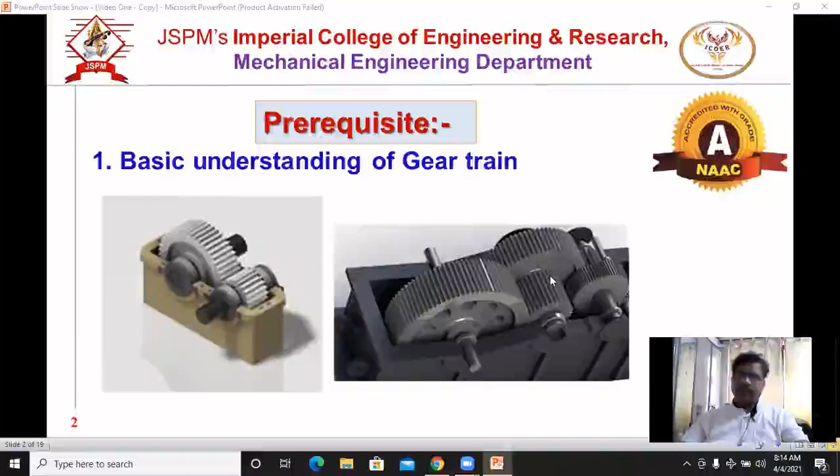He should know. Gear train is nothing but a combination of gears by which you can reduce or increase the velocity ratio, or you can transmit the power and motion. Also, the student should be knowing which are the different types of gear trains: simple gear trains, compound, reverted and epicyclic.

A simple gear train is one in which each shaft will be carrying only one gear. A compound gear train is one in which each shaft will be carrying more than one gear. Reverted is a special case of a compound gear train where the axis of input shaft and output shaft will be along the same line.

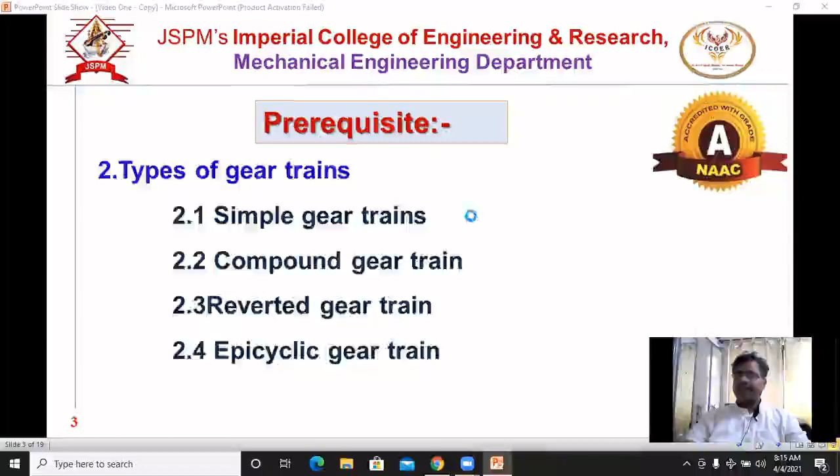And lastly, today's interesting gear, that is epicyclic gear train. In this one, we will be having certain arrangement like sun and planet, or epicyclic in nature. So for this we are going to find the holding torque. These are the prerequisites. Then this thing also the student should know before conducting this experiment: the concept of epicyclic gear train or its working he should be knowing.

The epicyclic gear train consists of a sun gear which will be acting as the input gear and the arm which carries the planet gears. The input is sun gear, output is the arm carrying the planets. This is encompassed by one internal gear called as the annular gear. Annular gear will be having the internal teeth.

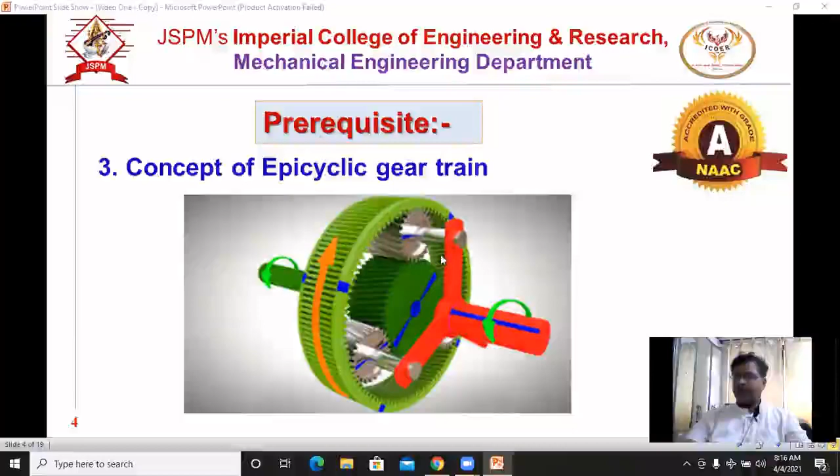Now what is holding torque is, if I want to stop only this outer internal gear and at the same time all other gears are rotating, the torque required to be applied on this internal gear will be our holding torque. Again, the student should be knowing which are the different torques that are acting in case of an epicyclic gear train: input torque, output torque and the holding torque.

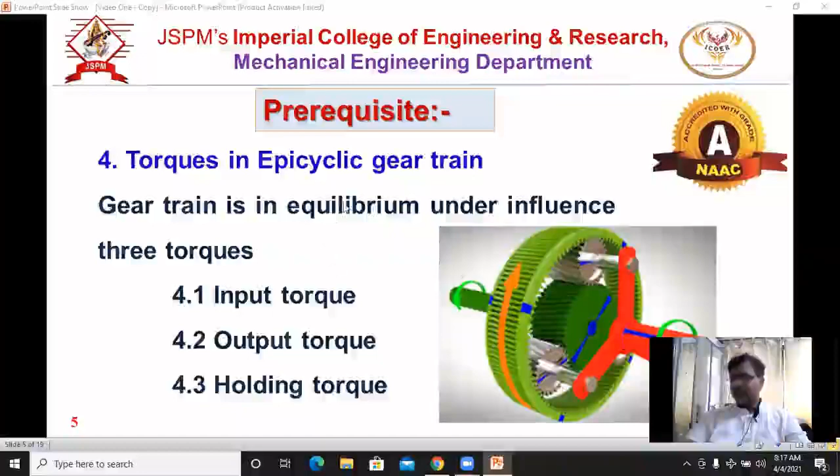The torque carried by this input shaft connected to the sun will be input torque. The torque carried by this arm shaft will be the output torque. Holding torque, the torque required to stop this annular gear. This is the holding torque. One more thing is the holding torque will be the difference of input torque and output torque. All these things the student should be knowing before conducting this experiment.

Now coming to today's objective, I want to measure the holding torque of an epicyclic gear train. Means what? I want to find how much amount of torque or load I need to apply on this internal gear to make this one stop. If I want to stop this annular gear, how much amount of force or torque I need to apply, I need to find. How I can find?

If I am putting a braking arrangement on this, if I am putting a belt drive and applying certain load, then for a particular load the annular gear comes to rest. I can say that will be our holding torque. Like this we can find practically. And if I want to find theoretically, how will you find it? Simply I will find how much is input torque and output torque. The difference of these two will be our holding torque.

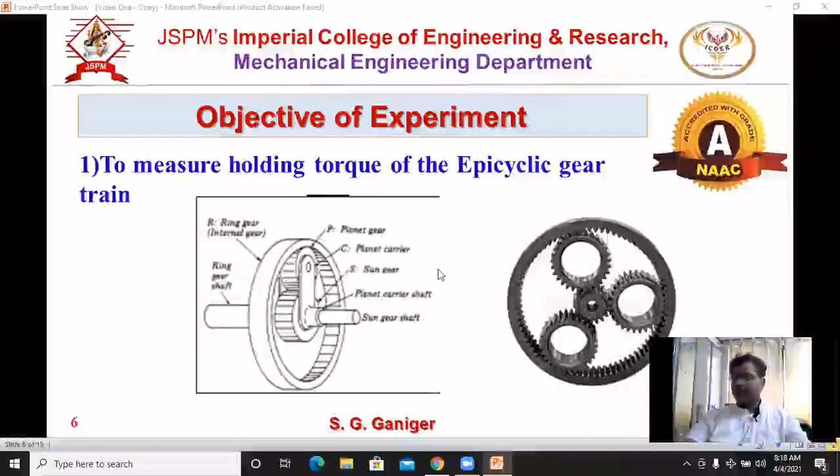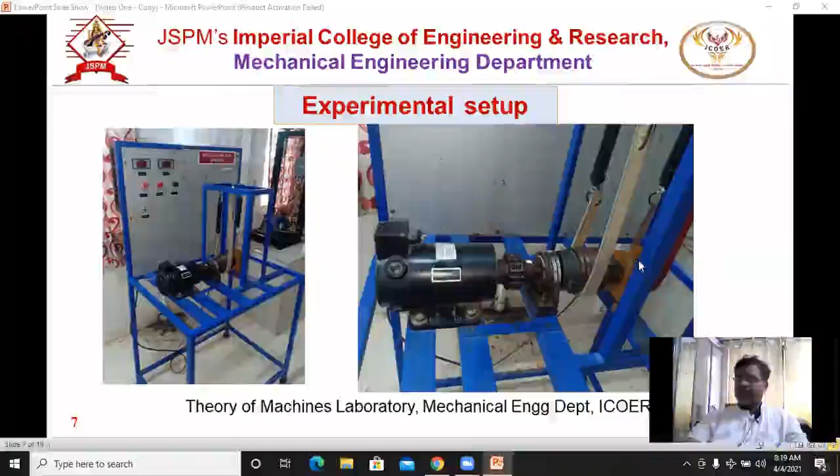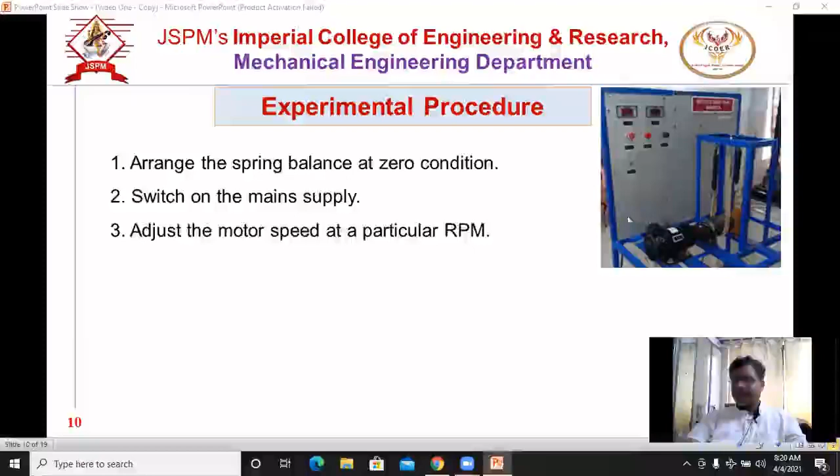Then switch on the mains supply. Adjust the motor speed at a particular RPM. Then we will be waiting for the system to be stabilized. Start the experiment by loading the pulley in a stepwise manner, starting with zero, and note down the reading required to stop the epicyclic gear train.

Initially we will be putting a certain load, let us say 0.5 kg, on the output shaft, and then we will go on applying the load on the epicyclic gear train till it comes to rest. When it comes to rest at that particular position, we will be taking the readings. Which are the readings? I will be measuring the input speed and output speed using the tachometer. Also I will be noting the voltage and current readings using the voltmeter and ammeter.

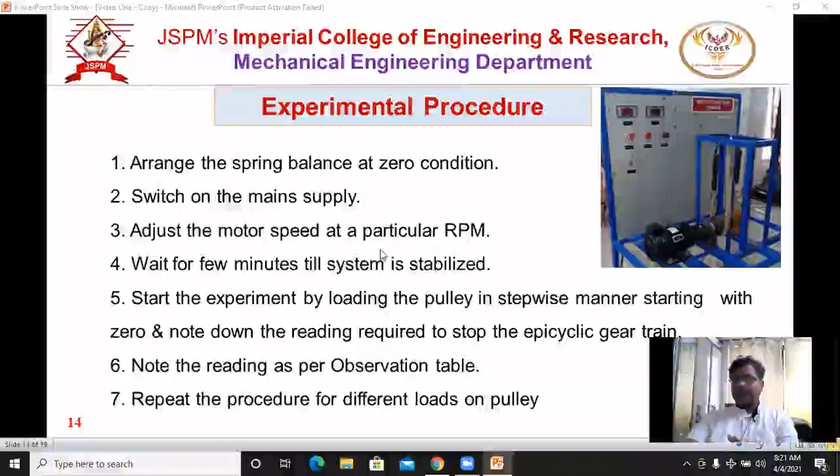Now if I want to go for the next reading, let us say 1 kg, I will apply 1 kg of load on the output shaft. Then I will go on tightening the epicyclic gear train using the spring balance till it comes to rest. When it comes to rest at this position, I will be taking the second reading. I will be measuring input speed, output speed, voltage, current. Note the readings, then repeat the procedure for different loads on the pulley.

This is our observation table. Now we will see the actual readings taken on the machine. Initially we will be putting a load of 0.5 kg on the output pulley. Then I will go on tightening the epicyclic gear train. Say for 2 kg of load on the epicyclic, it is coming to rest. At this position, I will be taking the reading. I will measure the input speed, output speed, voltage, current. This is the first set of readings.

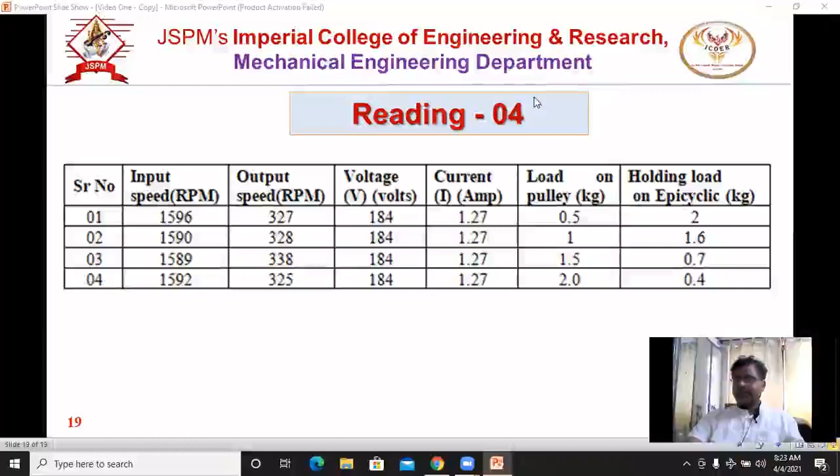Similarly, second. For the second, what change will be there? Instead of 0.5, I will be putting a load of 1 kg on the output shaft pulley. Then I will again be tightening the belt on the whole epicyclic till it comes to rest and take all these readings. Similarly, 1.5 kg and 2 kg on the output shaft pulley. Like this we will be taking the readings. Once we take the readings, we will be performing the calculations. And how we take the readings in the practical, I will explain with the actual experimental setup.

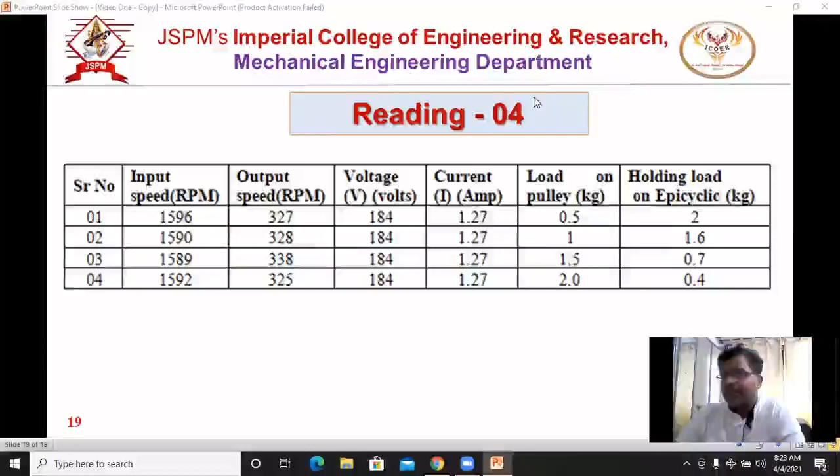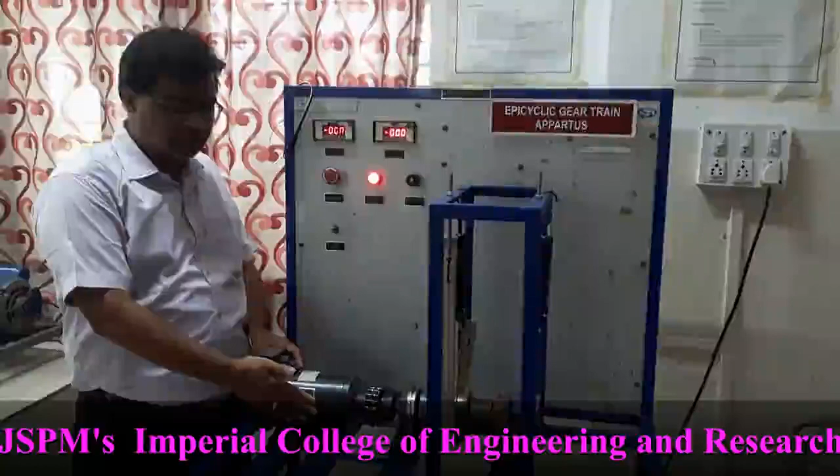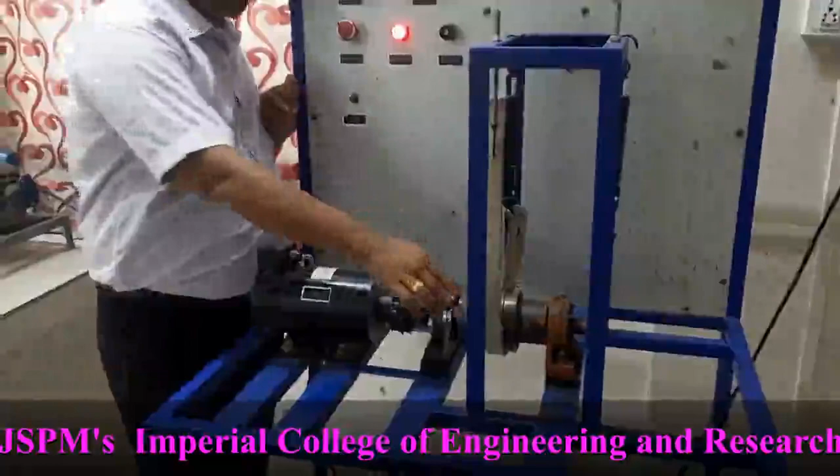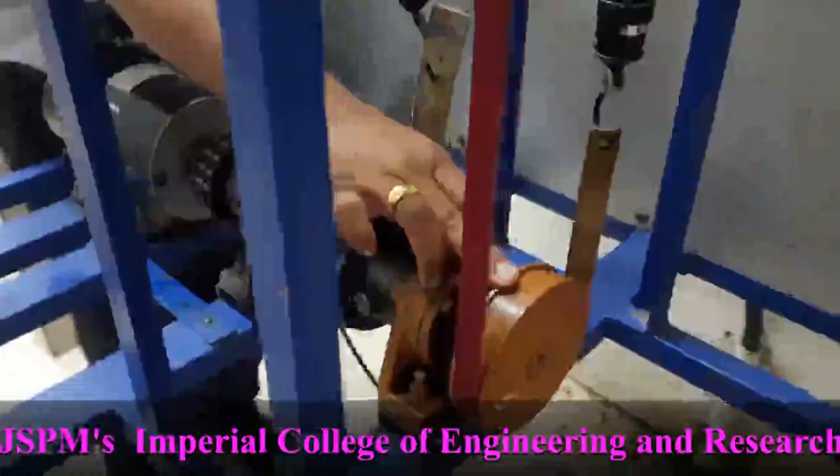Now this apparatus is called the epicyclic gear train. In this one we can see that this is the DC motor, this particular part is the epicyclic gear train, this is the input shaft of the epicyclic gear train, and this is the output shaft of the epicyclic gear train. It is connected to the pulley like this. Now on this epicyclic we have a loading arrangement using this belt here. Then on the output shaft, that is the pulley, we have a loading arrangement using this spring balance.

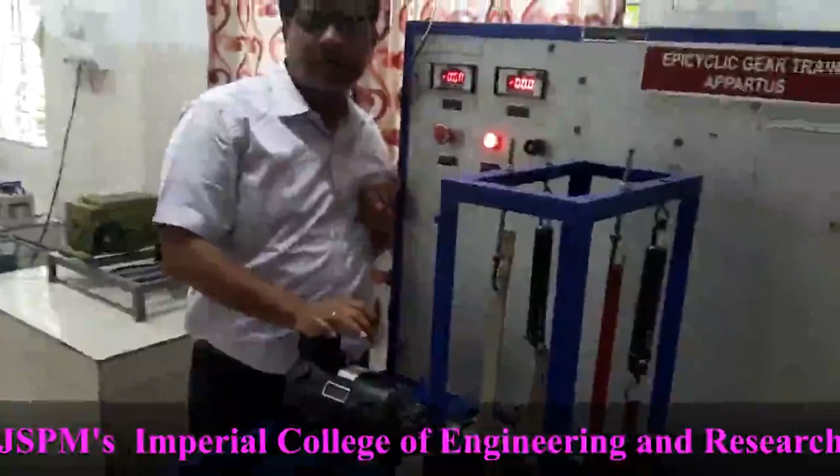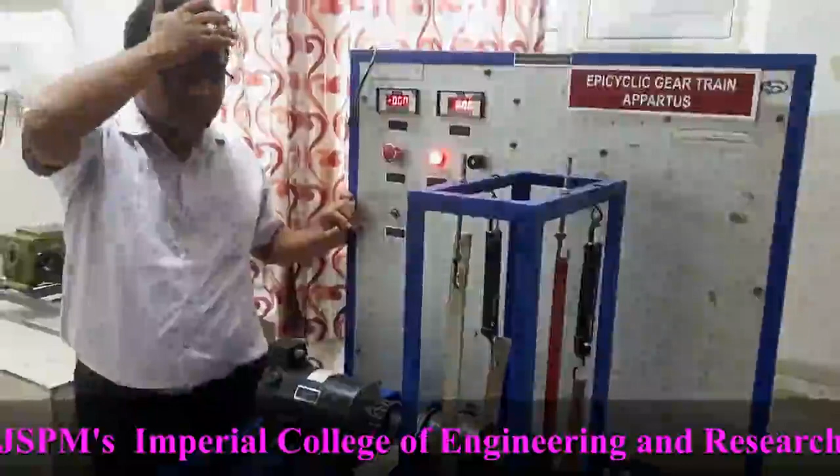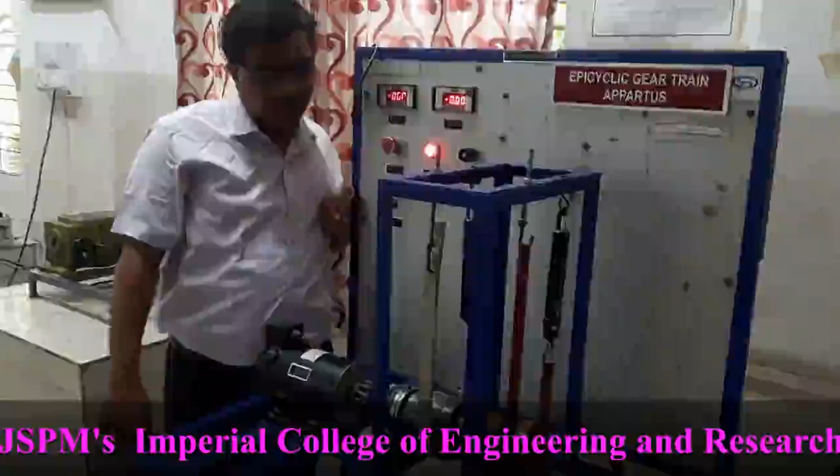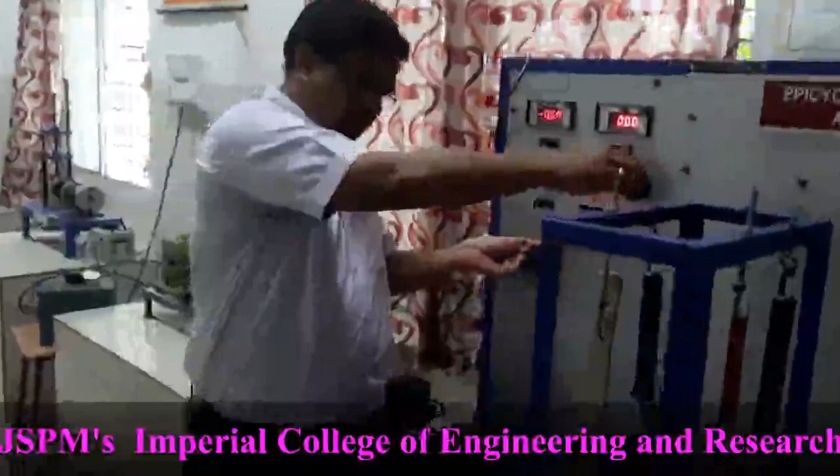Now the epicyclic gear train consists of the sun, planets and the arm. The input shaft is always connected to the sun gear and the output shaft is always connected to the arm carrying the planet gears. In this one there are 3 planet gears, 1 sun and 1 arm. The arm is connected to the output shaft, which is connected to this pulley. Now when we operate this DC motor, we can start the motor like this. Now you can see that it is rotating.

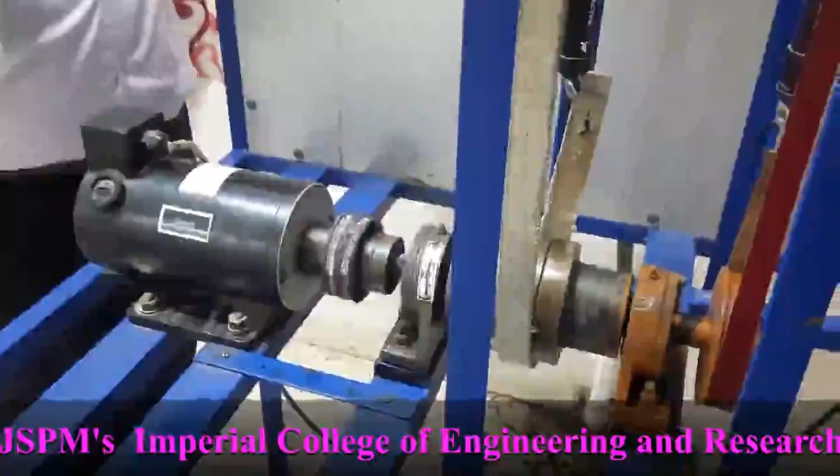So if we make this output shaft free by loosening this spring, and operate it, we can see that the output shaft is also now rotating, is it not? Now at the same time I loosen this also. Now you can see that all the things are rotating, that is the input shaft, the epicyclic gear train and the output shaft.

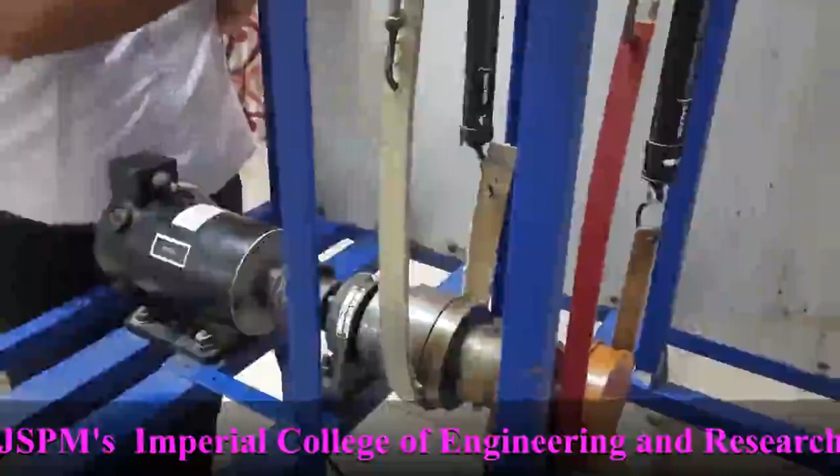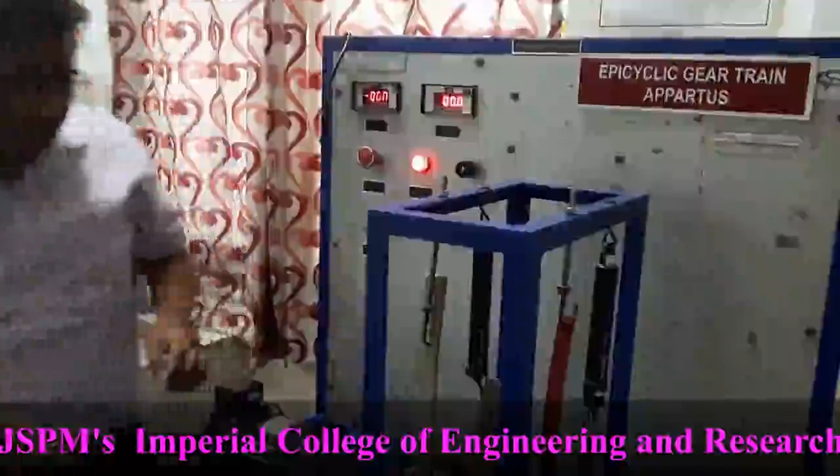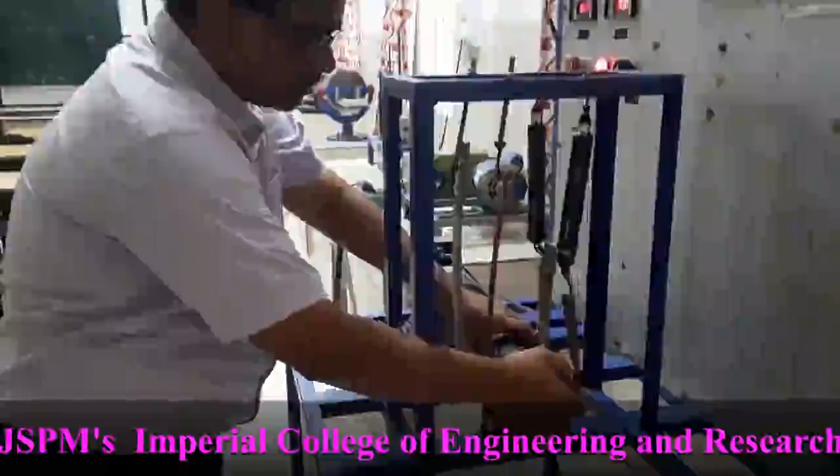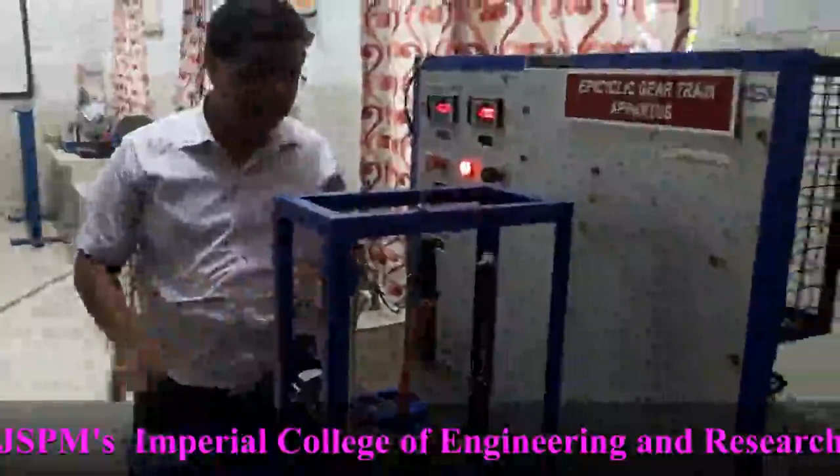So there is one term called the holding torque. Holding torque is basically the torque required to only stop the epicyclic gear train. Now to understand this holding torque, if I am holding this one tightly and I rotate this output shaft, we can see that I can rotate the output shaft, but still the epicyclic gear train is not rotating. Then how is it getting the motion? See, in this one we have the sun gear connected to the input shaft, and the arms. So holding torque is defined as the torque required to stop the epicyclic gear train while the output shaft is rotating.

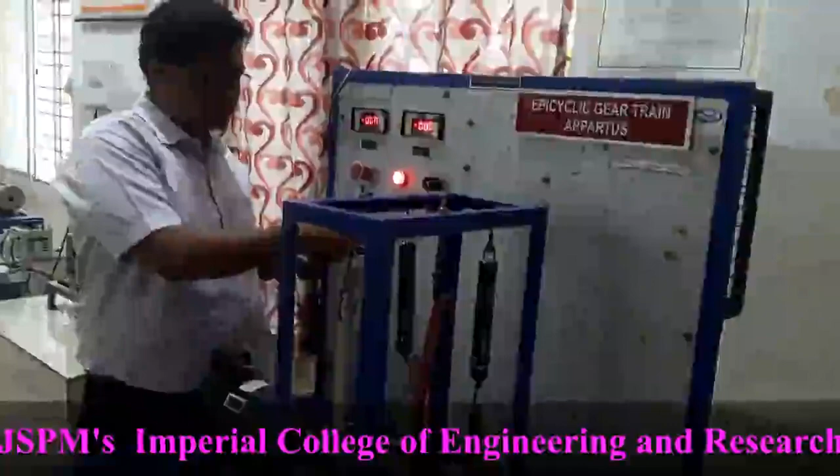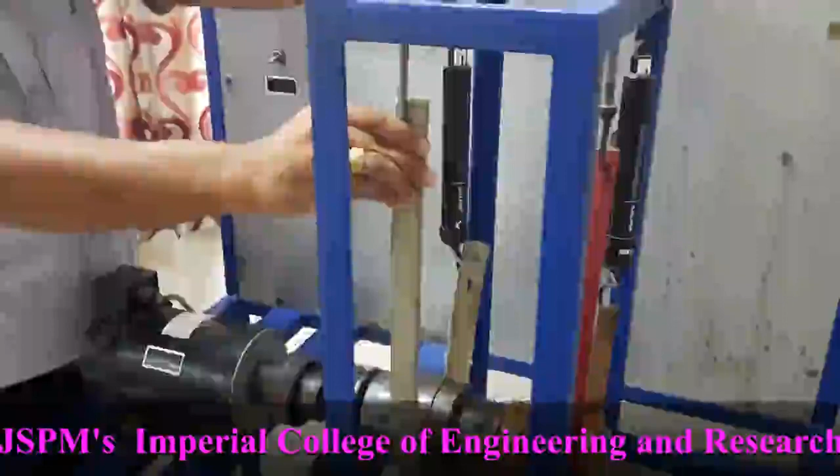So to understand this, suppose I am starting the motor. Now it is rotating with certain speed. Now if I go on increasing the load on this epicyclic gear train, now you can see that this is stopped, epicyclic gear train, input shaft is rotating and the output shaft is also rotating.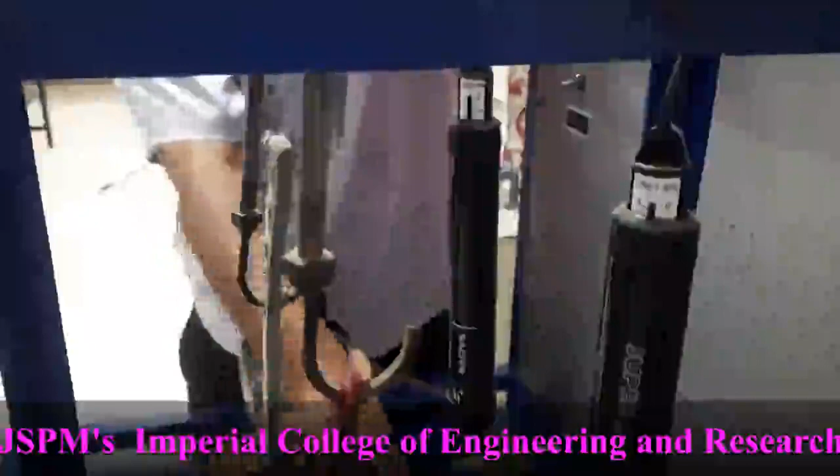So whatever torque I am applying, that is the torque applied at this end. How can I measure this one? That will be measured by spring balance mass M. Suppose it is 0.75 kgs. 0.75 into 9.81 into its radius. Like this I can find the holding torque.

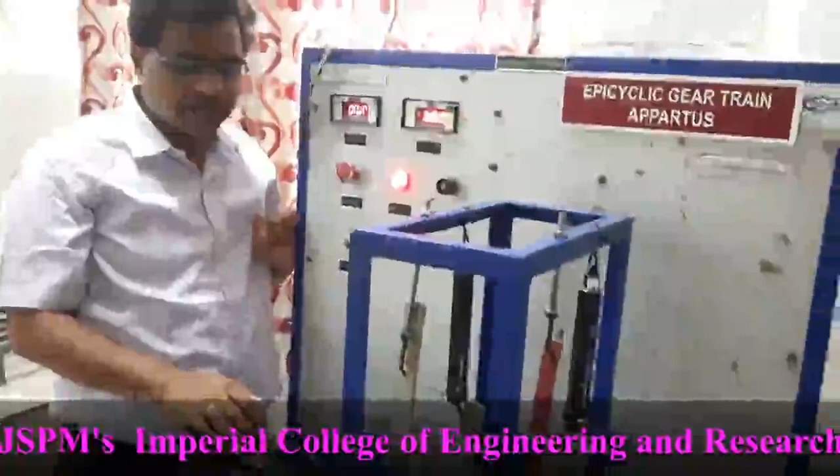Now because the power remains same, whatever the input power is there, the same power will be transmitted to the output shaft. If we are neglecting the friction, then the same power will be divided, some to this and some part to this. Now to find the input torque, I can find the input power. How can we find the input power?

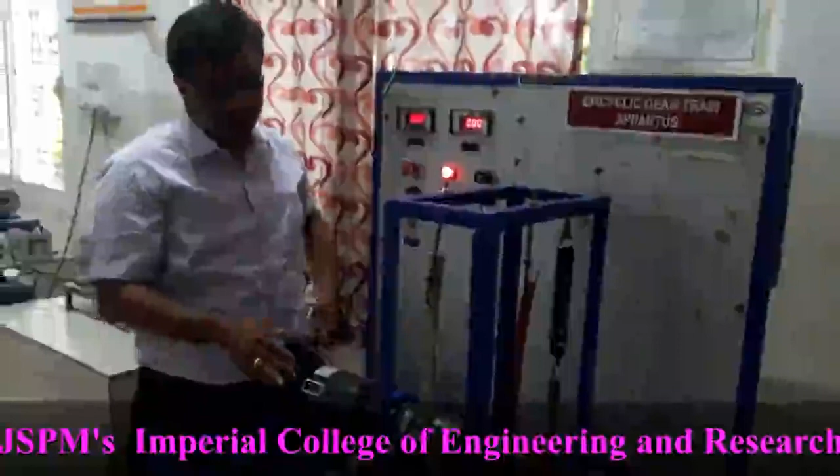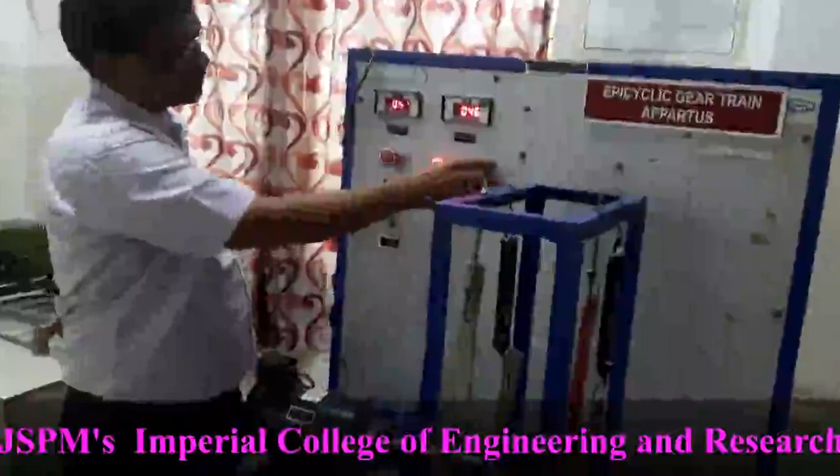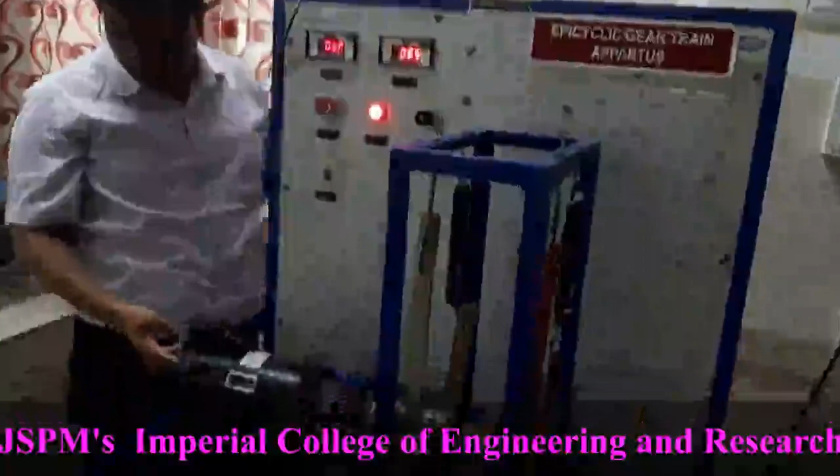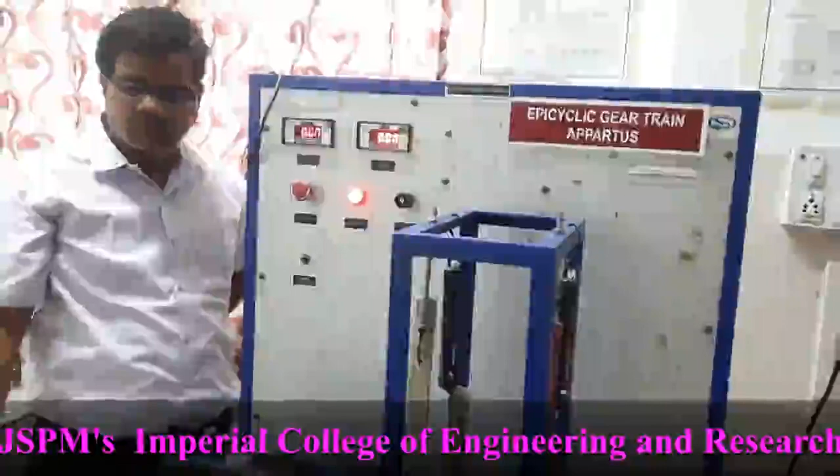See, it is a DC motor and here you can see that we are having voltmeter and ammeter attached. So when we are operating, we will be having certain readings on this voltage and current. So if I am multiplying these two, I will be getting the input power. Now by using a tachometer applied at this end, I can find the speed of this DC motor. So once I find the power and speed, by using the equation P equal to 2 pi N T by 60, we can find the input torque.

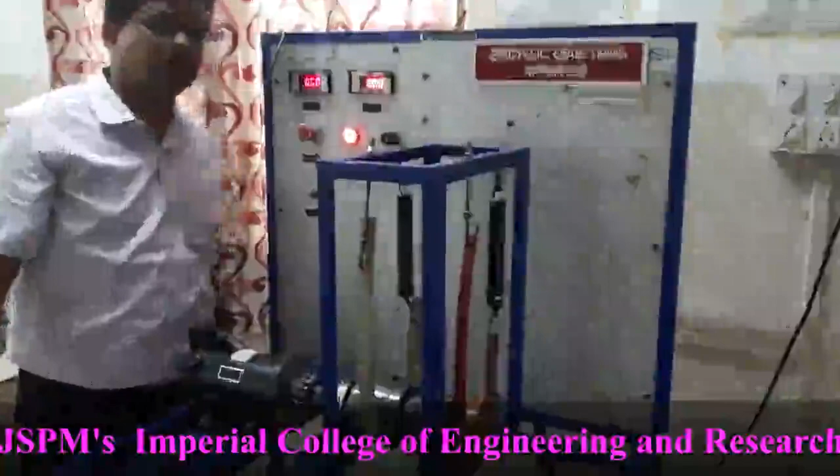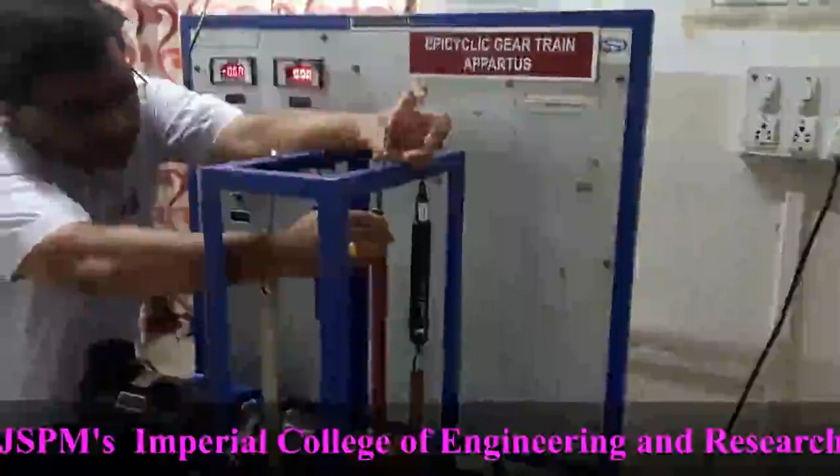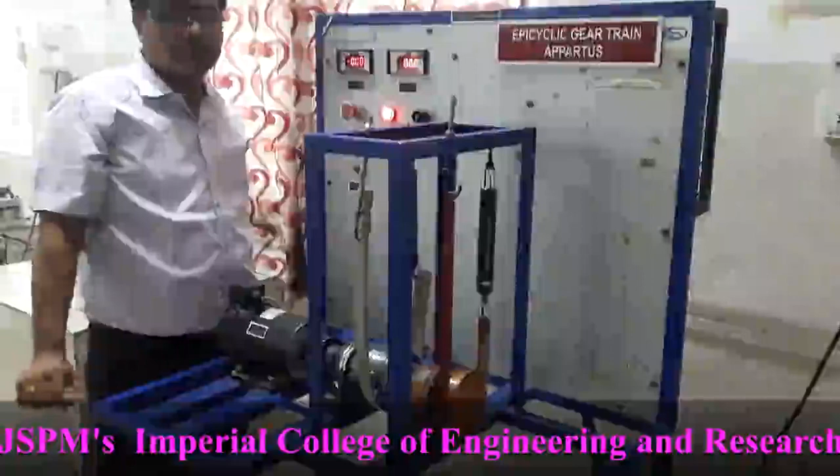Now let us see how we can find the output torque. To find the output torque, we can use this spring balance. See, if I am attaching up to this level, now what is the spring balance reading? How much is this one? 1. Now let us say we have adjusted this one to 1.5 kgs. So the spring balance is showing 1.5. So the output torque is 1.5 kgs into 9.81 into radius of this rotating pulley. So like this we can find the output torque.

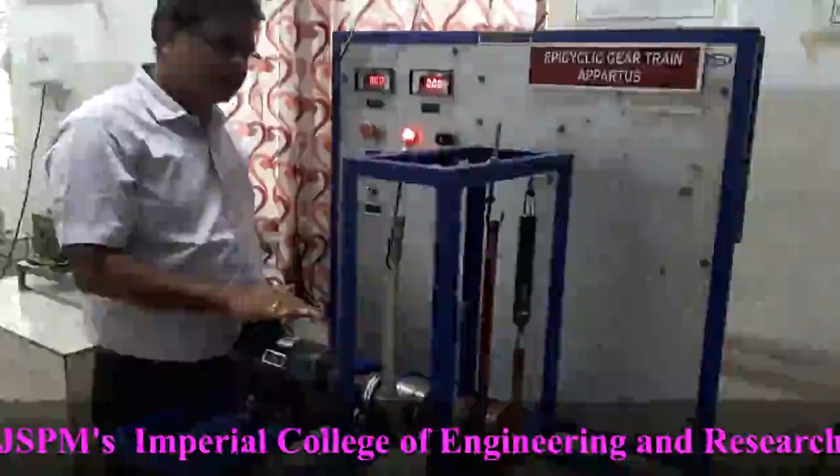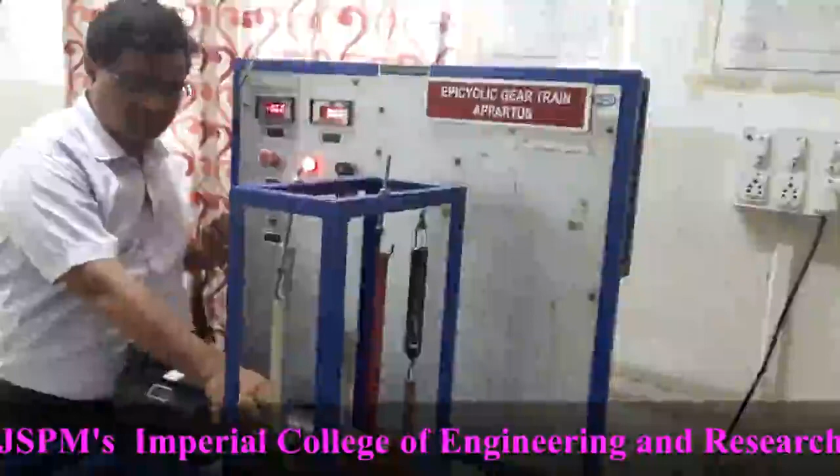The input torque minus output torque will be equal to the holding torque. So in this experiment we will be finding the holding torque. Now let us define holding torque. Holding torque is the torque required to stop only the annular gear of an epicyclic gear train. See, this outer part is called the annular gear. It will be having the internal teeth. That will be always equal to input torque minus output torque. So this is the background of this experiment.

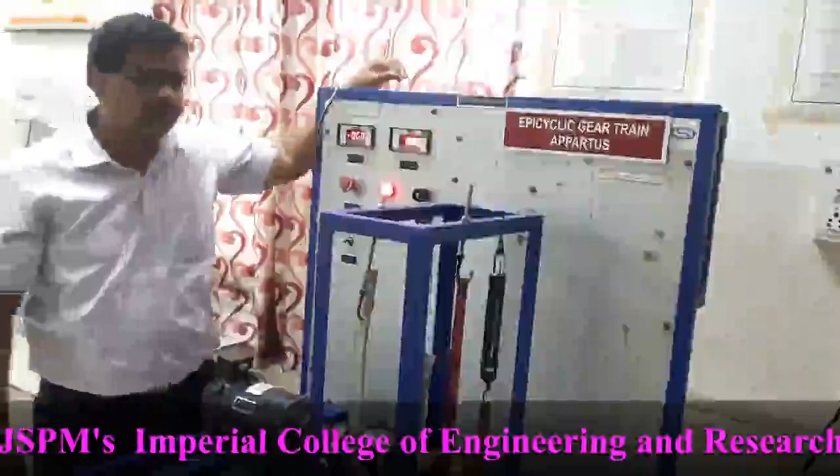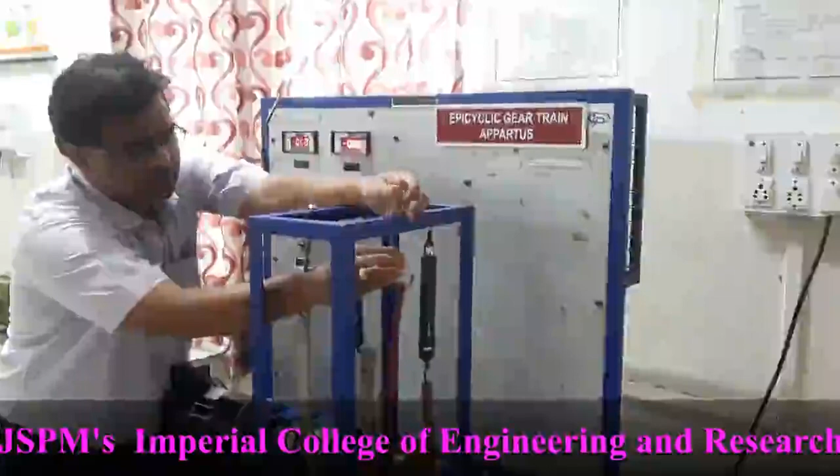Now to start with the experiment, I will be showing the reading columns in the theory part, or I will be sharing the lab manual later. Now for practical procedure, first we have to apply zero load on this output shaft. That is, we will make this one completely free. So now it is having no load. Then we will be making this also free. Then we will start the motor and keep a certain speed.

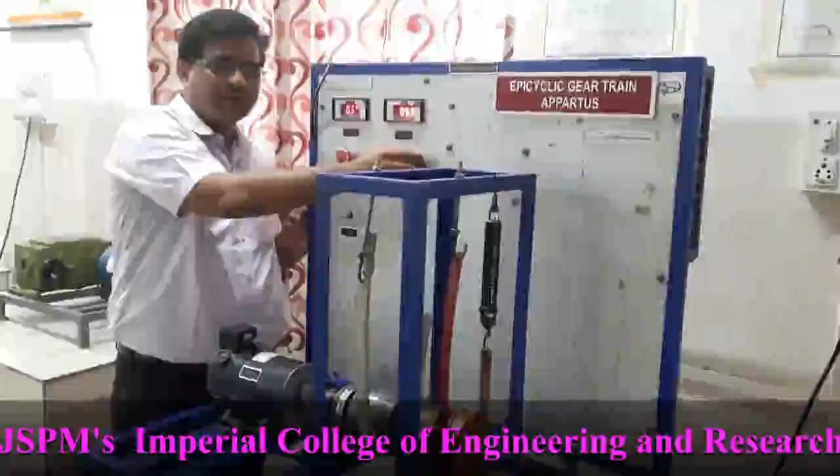Now at this speed, we will go on applying the load on the epicyclic gear train. Say at this point of load, the epicyclic gear train is stopped. Now this will be the holding condition. We are holding the epicyclic gear train. At this point we have to note down ammeter and voltmeter readings, input speed, then output speed, and what load we are applying on the epicyclic gear train. So this will be your first reading.

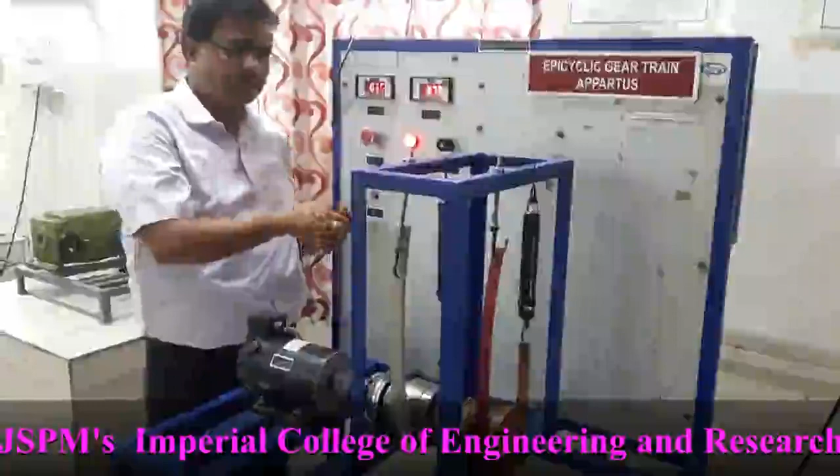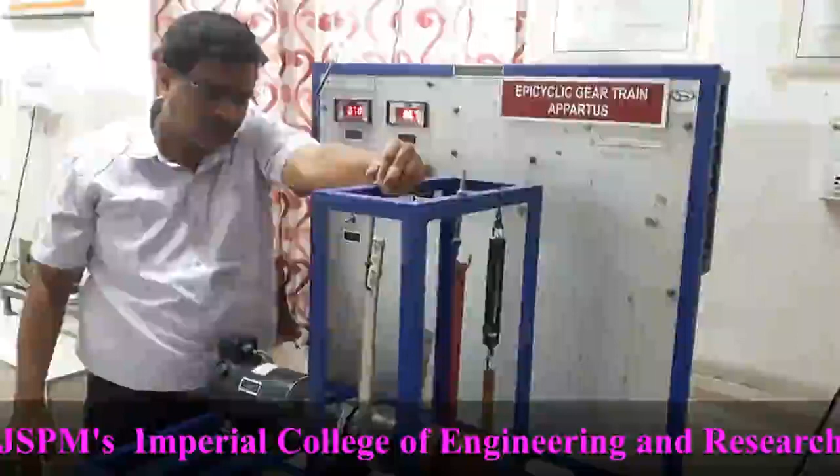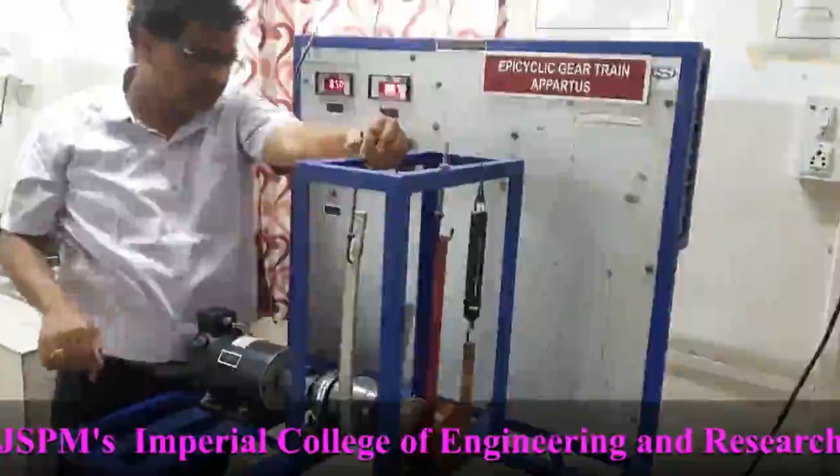Then to go for the second reading, again you have to free all the things. Then we will be applying say 0.5 load on the output shaft. Then we will repeat the same procedure. I will go on applying the load at the epicyclic gear train till it comes to rest. So now it is coming to rest. At this location we will be noting the ammeter and voltmeter readings, because from that we will find the power. Then we will be noting the input speed, then output speed.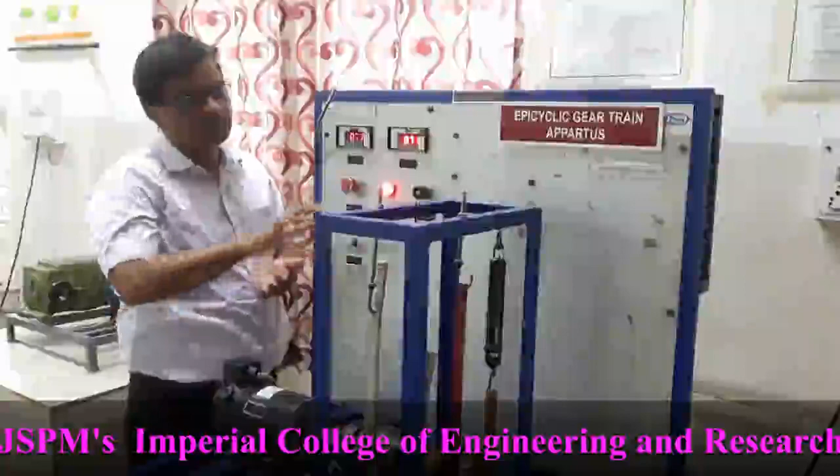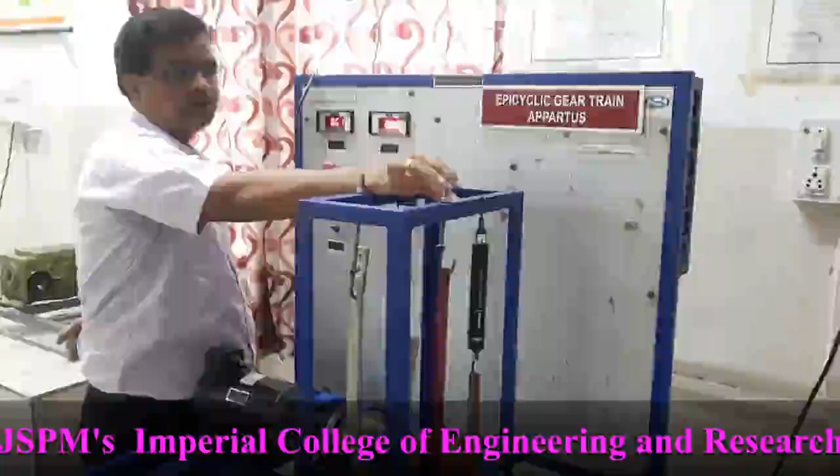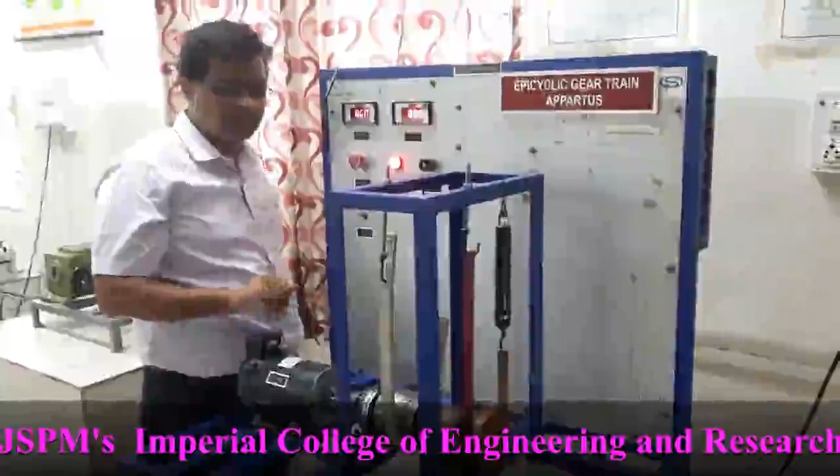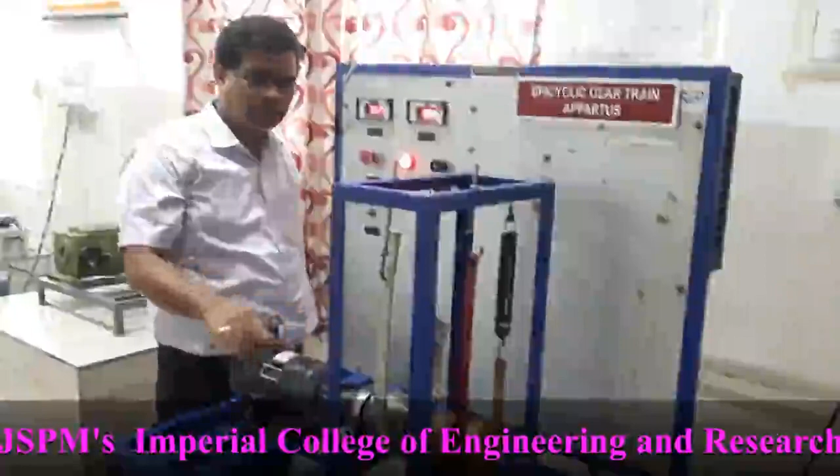So like this we can go on taking new readings where I will be applying certain load on the output shaft. Now the load is 0.5 kg. Next I will apply 1, 1.5 and 2. Up to 2 kg it can take. So for these 4 readings we will be repeating the same procedure and taking the readings. Now what we can observe is, this is the input torque, that will remain same. Then this is the output torque. When we are increasing the load on this one, this output torque will be increased.

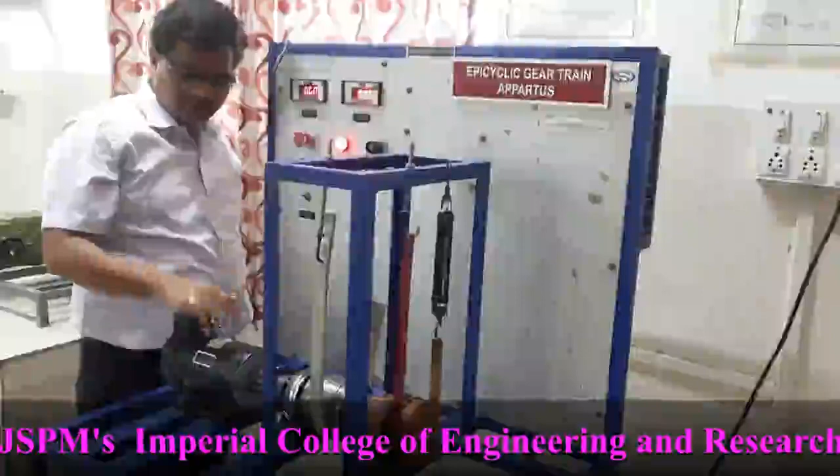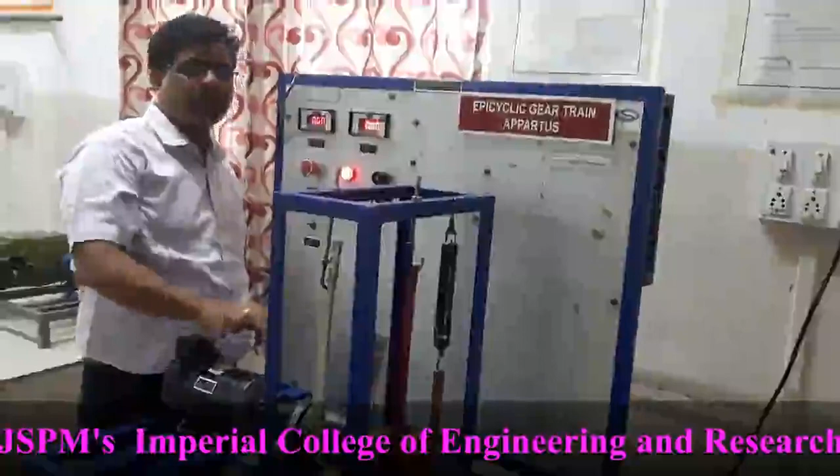Holding torque is input torque minus output torque. So when we are applying certain load on this output shaft, what happens? The holding torque will be reduced. So in the first case, when it is free, suppose we are applying say 2 kgs of load on the epicyclic to hold it, and in the next case if I am applying 1 kg, in the second case the load required to hold will be lesser than the first case, because input torque is same but output torque is increased.

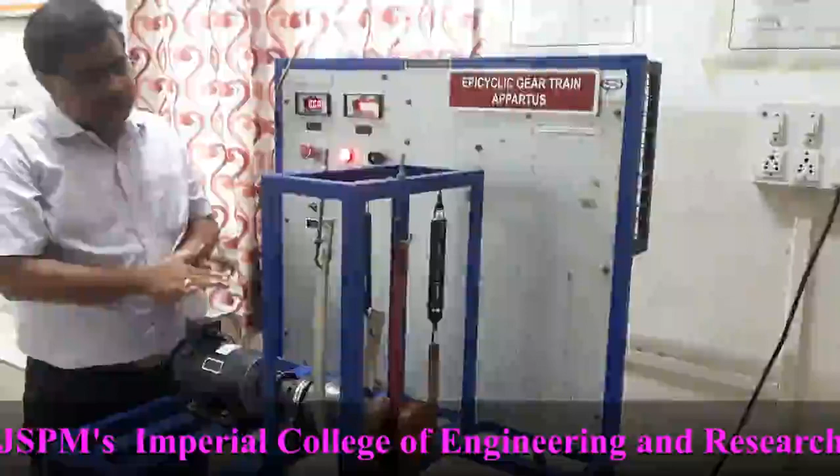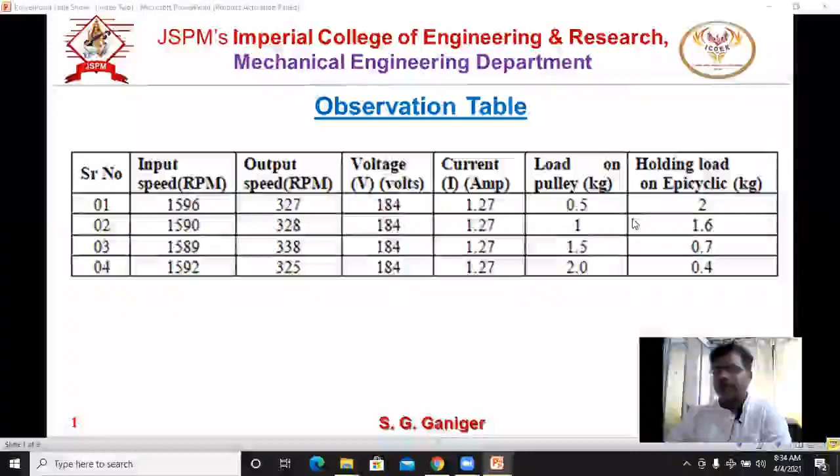So like this, by this experiment we can see the meaning of holding torque and the procedure to find this. So after taking the readings like this, we have got the table. We are having the input speed, output speed, voltage, current, load on pulley, holding torque or holding load. All these things we have got by experimentation. Now let us see how we can do the theoretical calculations.

First we have to find the input power. Input power can be found by the product of voltage and current. So I am getting 233.68 watts. Once I find input power, I am interested in finding input torque. Why? Because the holding torque is the difference of input torque and the output torque. Input torque, how we can find? We are having P = 2πNT/60 equation. By using the same equation I can find the input torque. P I have put in watts, N in RPM, and I will be getting 1.39 Newton meters.

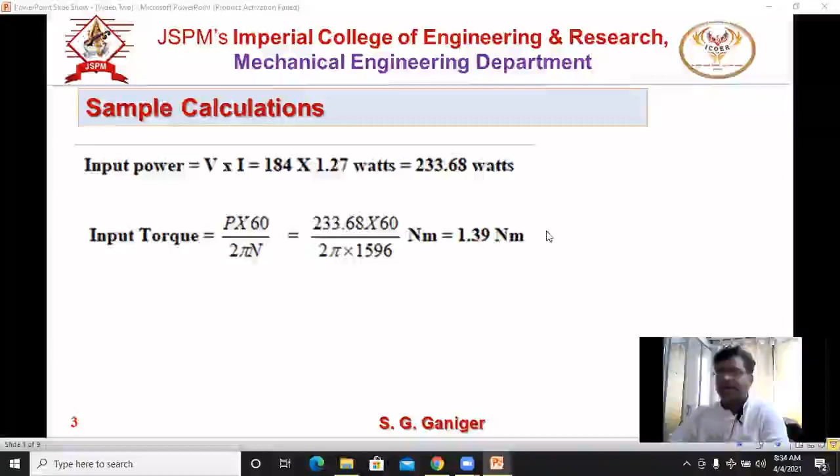Then how we can find output torque? The output shaft is the rightmost shaft which is having a pulley, and the mass of that pulley is known, that is 0.5 kgs. Radius of that is known, that is 0.05 meters, and g. So those many Newton meters will be the output torque. It is 0.245 Newton meter for the first reading. Therefore, the holding torque can be found as input torque minus output torque. So it will be 1.145 Newton meters. So this is a sample calculation for the first reading.

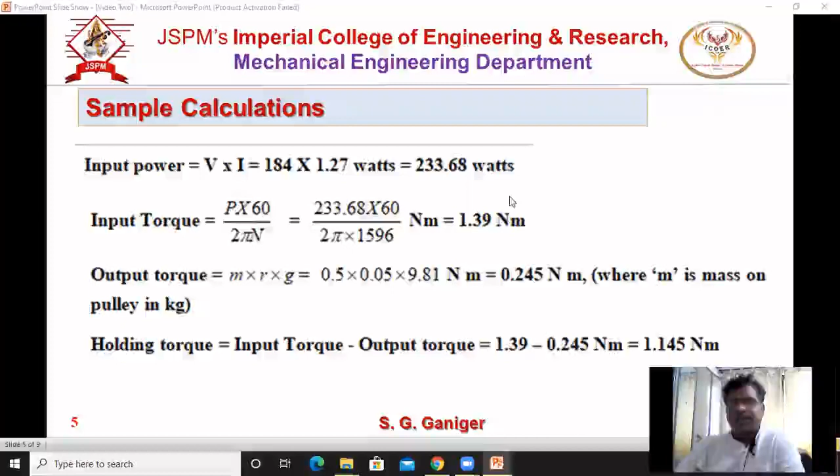Similarly, I will be doing the remaining 3 sets of calculations, and finally we will be getting a result like this. This is input torque, output torque, and the holding torque. So you can see that as I am increasing the output torque, say initially it was 0.245, at that time holding torque was 1.145. When I am increasing this output torque, the holding torque has decreased. And input torque is almost constant because I am using the same amount of voltage, current, and speed. The holding torque being the difference of input torque and output torque, as this output torque increases, the holding torque will be decreasing.

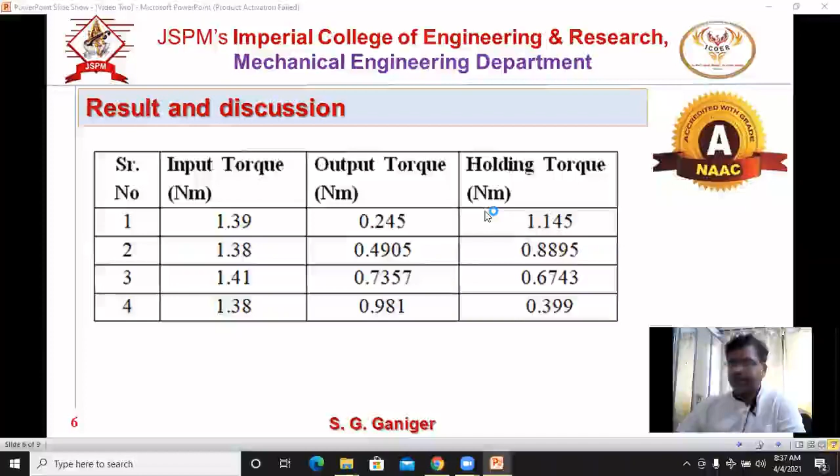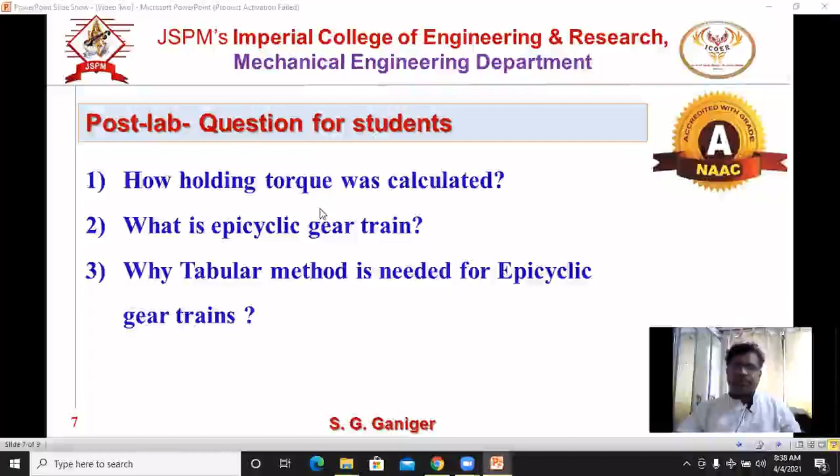So once a student performs this experiment, he can self-evaluate by asking these types of questions. How we can find the holding torque? Holding torque can be found experimentally as well as theoretically, as explained previously. And what is an epicyclic gear train? And what is the tabular method to analyze the epicyclic gear trains? The epicyclic gear trains are not as simple as the regular gear trains. Only by counting the number of teeth we cannot find the velocity ratio in case of epicyclic gear trains. For that we will be requiring a special method called the tabular method. The student should be knowing this also after conducting the experiment.

Now, what are the conclusions we are drawing from this experiment? First, the epicyclic gear train is in equilibrium under the influence of three torques: input, output and holding torque. Holding torque is equal to the difference between input torque and output torque. Even if the annular gear is stopped, the motion can be transmitted from input shaft to the output shaft. The advantage is that because there are a large number of rolling elements with a higher pair, we can transmit a larger amount of torque at a lesser speed.

And this type of gearboxes are finding wide applications in heavy machineries, tractors and many other things. So this is regarding our epicyclic gear train experiment.